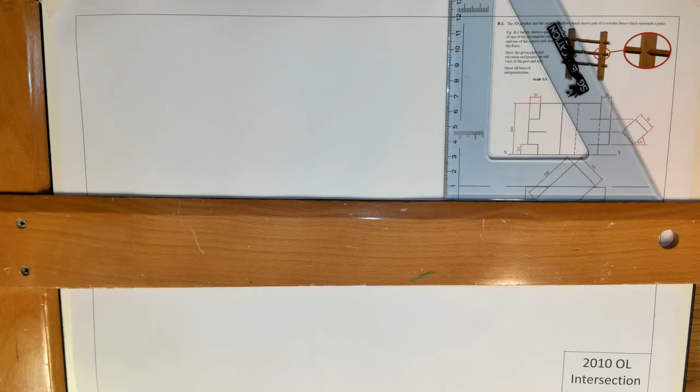So this question is 2010 ordinary level, intersection solids again, and we're going to have a similar problem. I think the end view is going to come over onto this, but I'm going to draw on top of it. If you're doing it at home, what you could do is take out a blank page and do it.

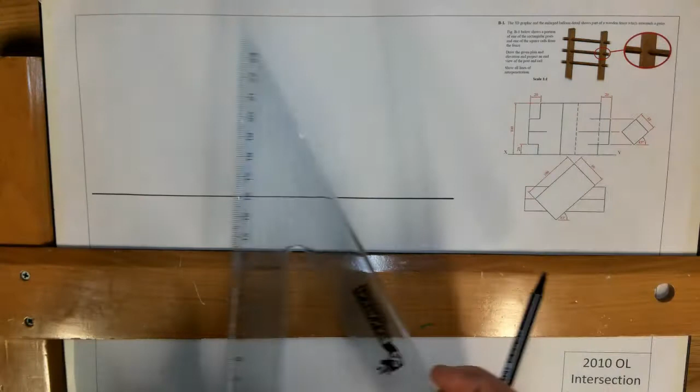So the first thing I'm going to do is come down about 120. The height of our upright is basically 100, so 120 should be fine, and we should have a bit of space. So again, because it's quite close to this view when I have the question put on here, I'm only going to come in 5, no more than 5. And I'll draw a line here like so. And then I'm going to come in 20 and I'll draw this line.

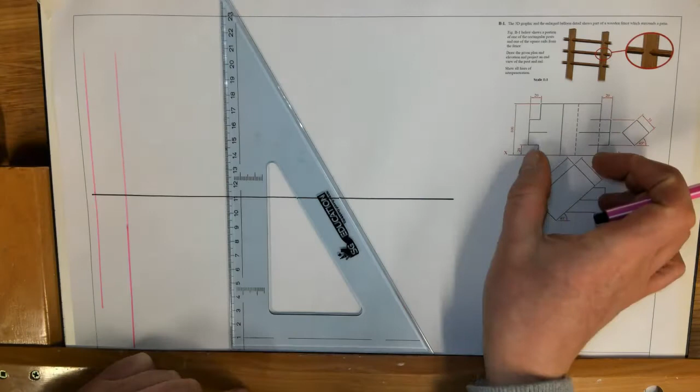And then I become stuck in the fact that I don't know this width, so I have to draw out the plan first. So this is a 45 line, so be careful that you use this set square. When I was drawing it first, I accidentally used the other set square. And we're going to start with this point here. So we know that this is 100.

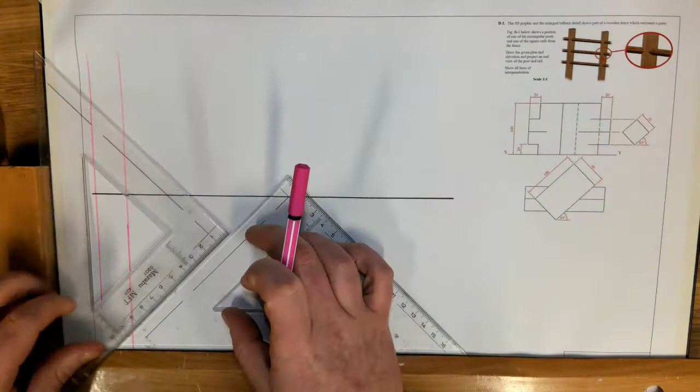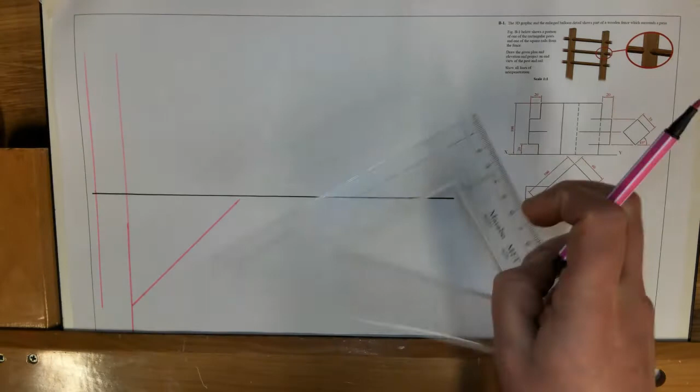So keeping it up as close as possible will allow me to minimize the distance it goes across the page. I think when we did this before, this worked out at about 95 from my recollection. But anyways, we'll just measure. So what I'm doing is I'm just measuring how far I can go down that I'll get 100 millimeters and still be fairly close. So I can fit 100 millimeters there. Probably could have come up a tiny bit closer.

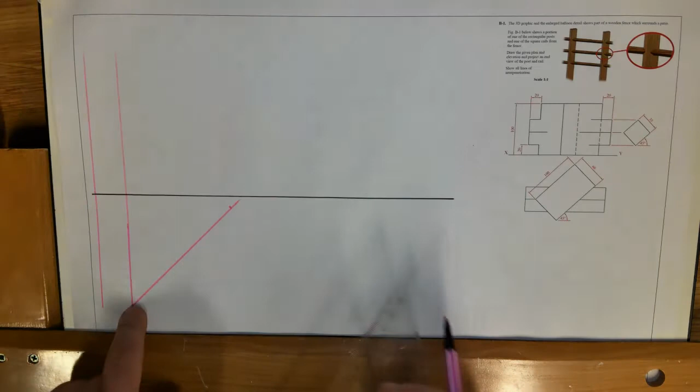No, sorry, I'm wrong. I come down about 80 millimeters for that point. Even 75 actually would be fine for that starting point, which is basically this one here. Okay, so 75 would work fine for that. So I came out 100 that way. I'll go 60 this way. I'll bring this down like so. And I'll bring this across to it.

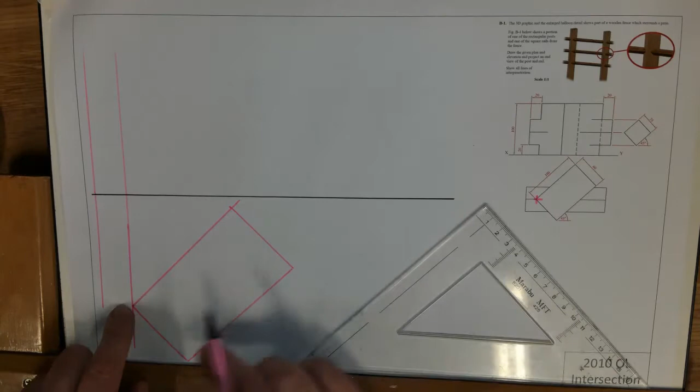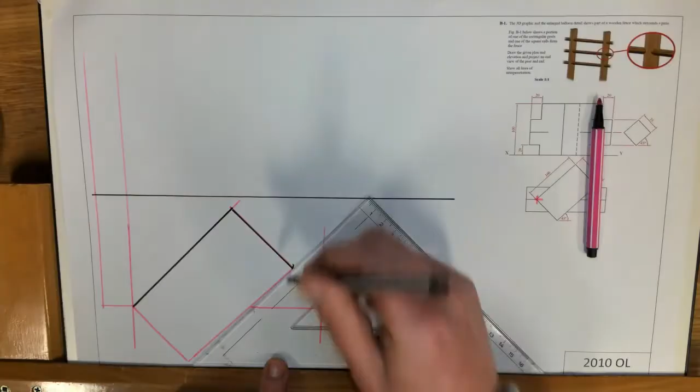Okay, and at this stage now I have the point for this line, and this here sticks out another 20, so I can draw that. So I'm now going to heavy in what I know. I'm happy with this shape here, the cuboid that's sticking up at 45 degrees. And I'll sort out the other line in a second. Okay, happy with this. And I can draw the center line across.

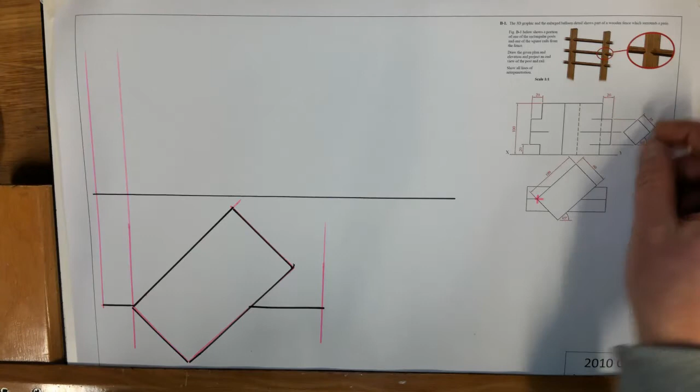Okay, so I'm going on top of my thing, that's why I can see one of them through the other. Again, I have a little tape here that's causing me a little bit of problem. But I have my basic shape there like so. Now, I can't measure this width. I know it's 35 this way, but I don't know, when I look straight down, what's the width from here to here. So what's the horizontal width, the straight across width? This is diagonal width or slanted width.

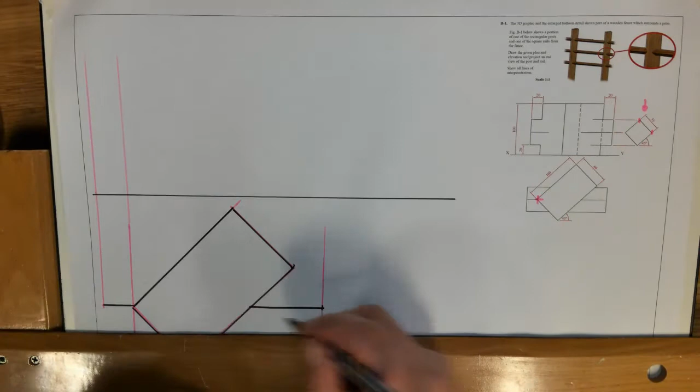So what I'm going to do basically is start drawing in some of the elevation, and then we're going to look at the end view in order to figure out this width. In some of the previous ones they gave you a distance this way so that you can figure it out. In this case we have a sloped distance and we can't use that to locate it. So what I'm going to do is bring up these points like I would typically. Okay.

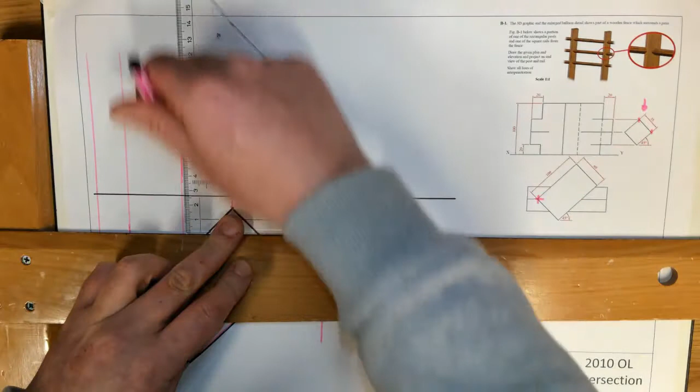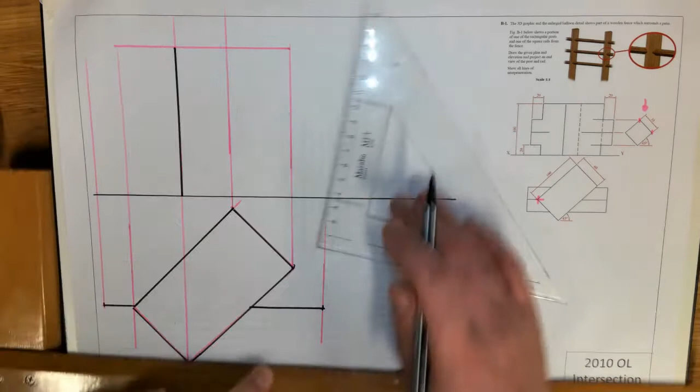And we'll start with the cuboid structure, because that's probably the easiest. So we'll go with 100 mil there. Now here we can't heavy it in because it's going to stop and we don't know those heights, and you'll see that in a second. But here I can draw it solid because if I stood here I'd see that line, and this one here I can draw it.

Okay, and this one here is a mixture of solid and hidden, but I'm not going to draw it in because I don't know exactly where it starts. Okay, so I do know that if I come up 20, I'll have the baseline. Okay.

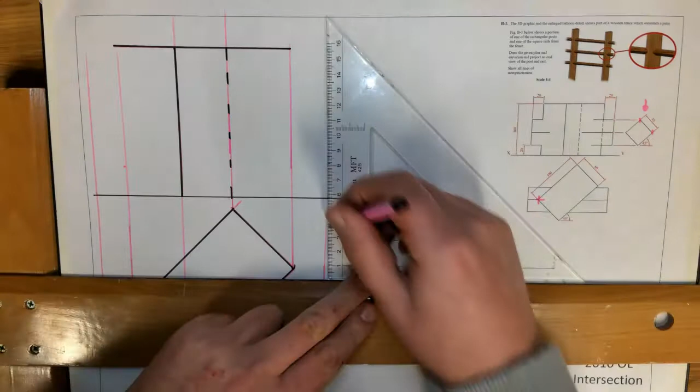Sorry, when I drew that line before, it was a little bit crooked. I must have accidentally had my T-square not in tight. Okay, so we have that baseline. Okay, so I'm sort of limited now on what I can do without an end view, and this wouldn't be uncommon. So what I'm going to do is, this is the end.

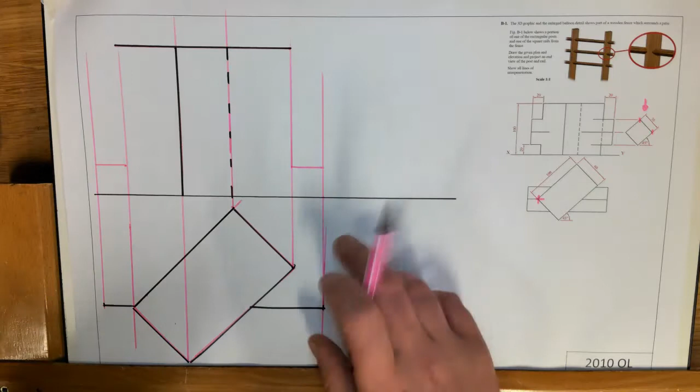So maybe, let's see, I'll shade. They didn't give a color this time, but I'm going to shade this thing here green, to sort of keep it consistent with what it was the last time. Okay, so I'm just going to shade this so that you can see where the end of it is, and the main reason for that is so that you can see where I'm putting my 45 degree line

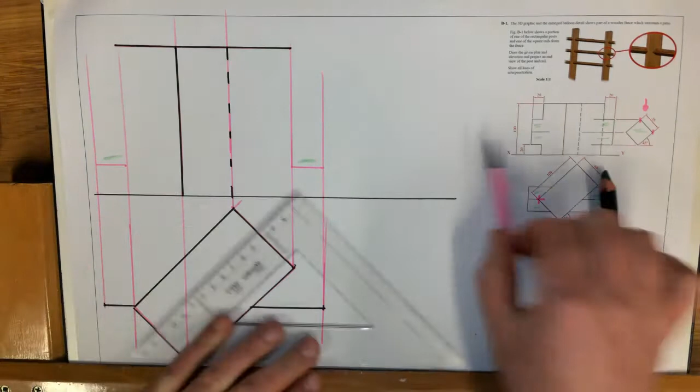at a slope. So I'm going to go down, as I've been doing, 45 degree lines from here, and then I'm going to project it across to meet the end view. I might be lucky, it may just miss the drawing. So I'm just going to use a slightly different colour, this orange, to bring it across. So at the minute, all I can bring across is those 4 points.

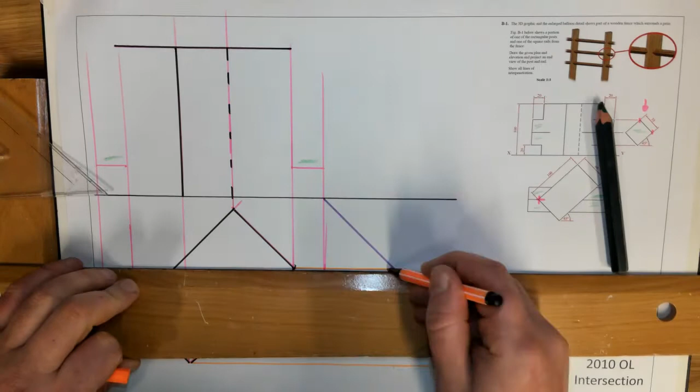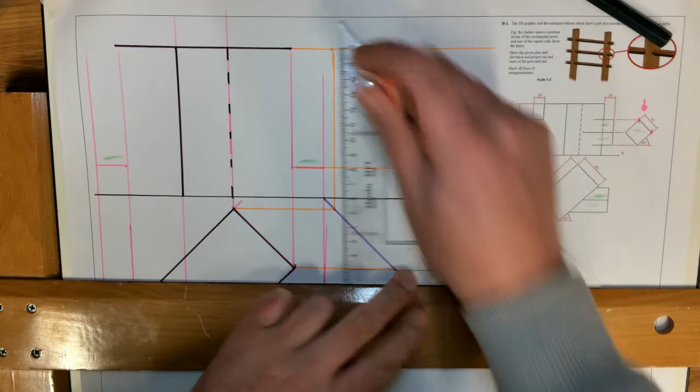And I can bring across this line here to this view, and I'll bring across this. And I'll probably have to extend this baseline. So it may come onto this view, we'll see in a second. So I'm going to bring these up from here. So this one here is fine. This one here is fine. And we'll just see now will it fit. Looks like it just will.

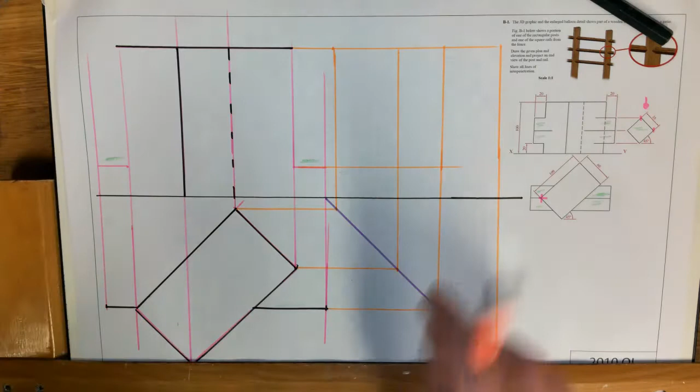So again, as I said, if I leave 5 millimeters of a gap here, this will just fit in on the other side. And again, this is another important distance. Only come down 75 for this point here. Okay, so what are we going to do? We're going to mark this point here as the center.

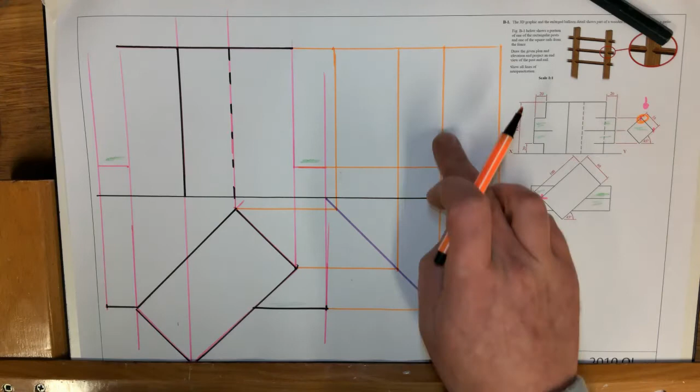So this is basically the bit that we have to take. This is the top edge of this. So basically this point here. So if I bring this up here, and it would also be the bottom, because one would be on top of the other, I can now draw in this shape here, my green shape, in this location. So just highlight that point. So that's basically the base point.

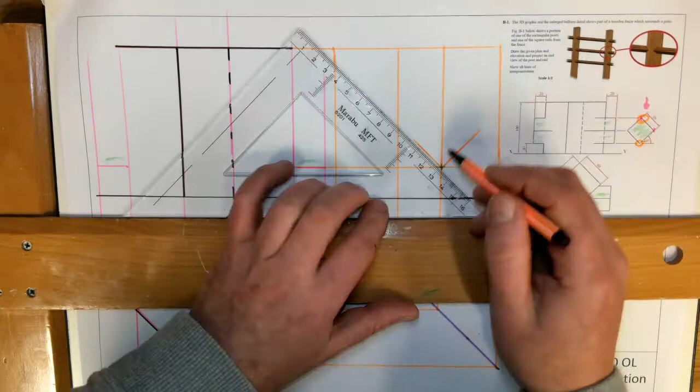So what I'm going to do is go at 45 degrees this way. I'm going to go at 45 degrees this way, maybe a little bit further. And I need to mark a distance of 35 on that. So 35. Okay. And the other side, I could mark it this way, or technically I can bring it straight across, and then come back 35 this way. And if I'm accurate, that should line up.

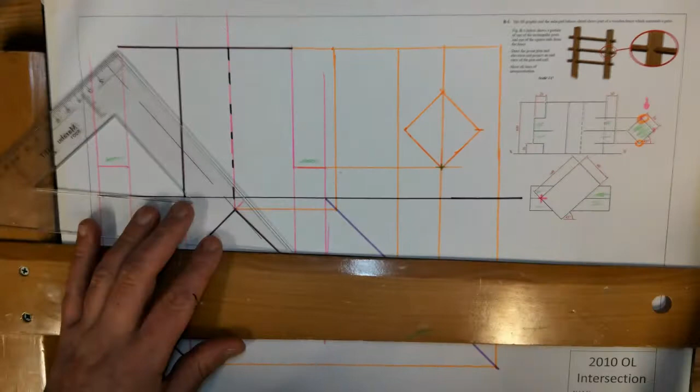So I have my, well, we'll call it a diamond shape in that view, but basically it's the cross rail that's coming across here. So what I'm going to do is heavy that in. Again, it'll make it a little bit more smooth. So hopefully that makes sense. So I'll just try to repeat what I did there again just to make sense.

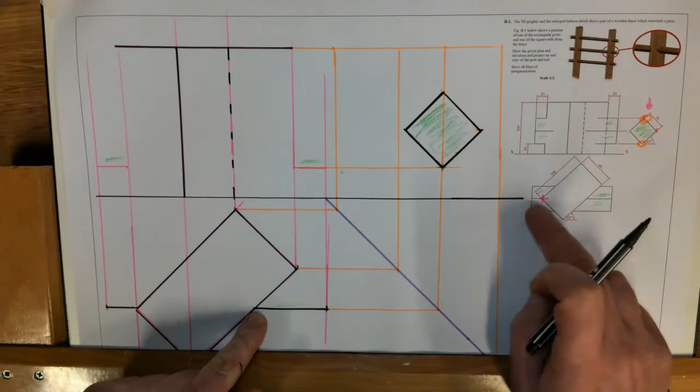So this is basically the top view of this structure that's coming in through the end view. So this point here is this line, which is the center. So what I did was I brought the center up and brought the center across at the starting point. I come out 45 degrees this way, measure 35, and I constructed that. So now once I have this, I can finish off this part by bringing this across.

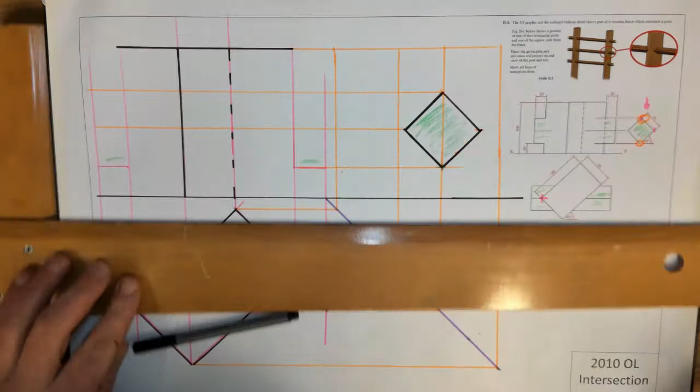Okay, and I'm just going to heavy in what I have just to make it a little bit more stable. So I now can heavy in the whole outline. So that was that, that was that, and that was that. And we'll worry about where the lines start and stop in a second, but basically on my lines I could actually do my hidden detail part there at this stage.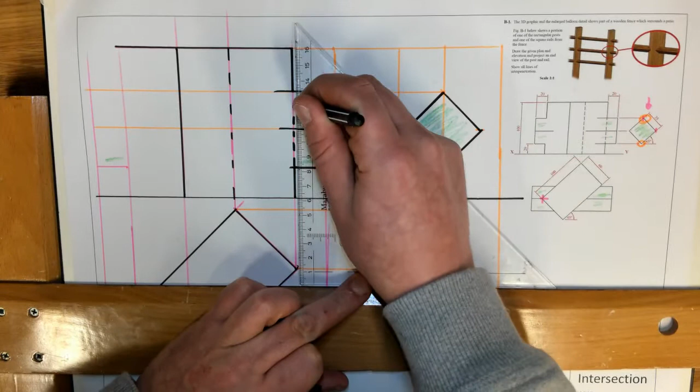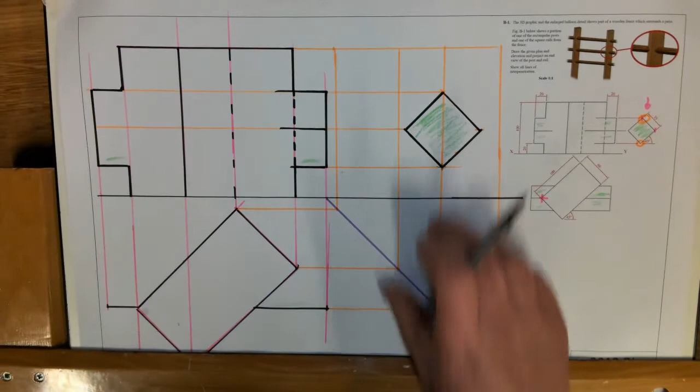Okay, and then this one here, we have it like so. Okay, so we have our front view done. We still have to complete our plan. So again, because I was able to bring these lines across, I can also work from this way back down. So I'll just use a different color. I'll use the pink to come back down. So that's this point. This point. I'm sorry, because the way this is, I should bring this down to the purple line.

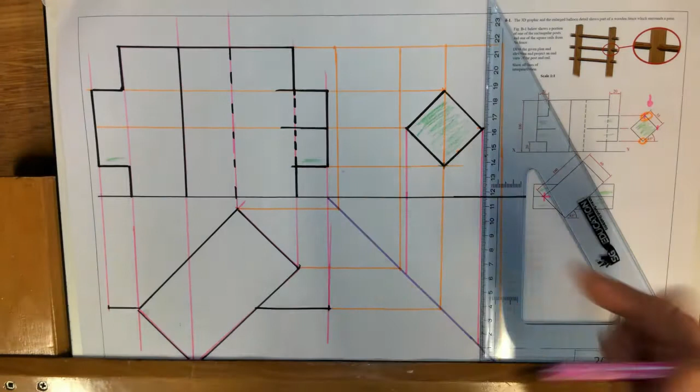Now, I could do this a different way. I could also just take this distance and step it off here. But I may as well project it back. It's probably the quickest way of doing it. Okay, and that looks pretty much perfect. Again, you can see there's a small gap between there and I have a small gap. So I'm happy with that. So I'm always checking the question off against what I'm producing. So I now have the plan completed.

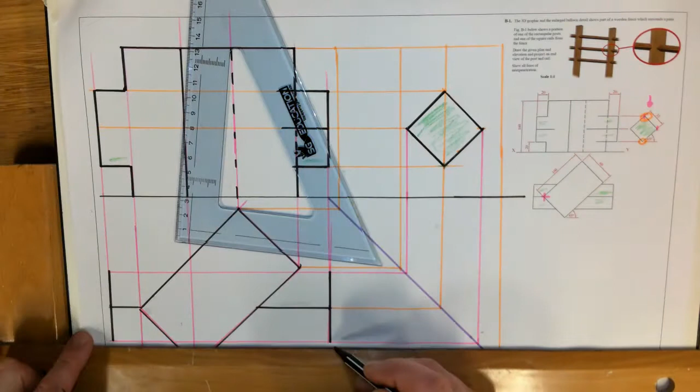Okay, so I've produced what I'm given here, and I now have to figure out these bits here. Again, I'm going to draw this line across. So I'm going to start on this side because it's the easier side. So again, we just shade this maybe in a green a little bit. I could spend a little bit more time, but just to speed up the video, you can see that there. So what I want to do is I want to figure out, well, where does this green structure go into?

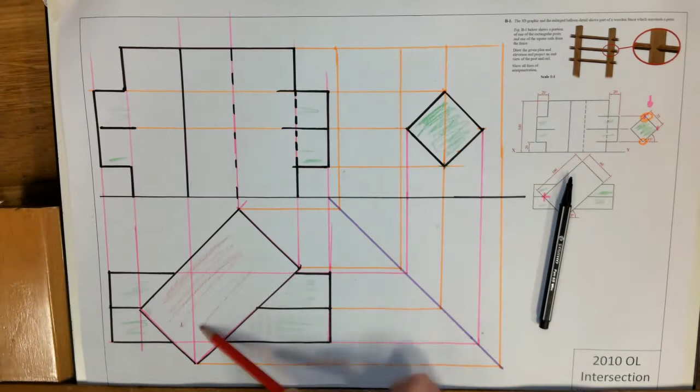Just get another colour pencil. We'll mix it up. Oh, I won't use yellow, maybe a teal. Oh no, that'll be too close to green. Okay, so maybe this orangey red. Okay, so let's see, well, where does that go into? We're not going to come as far as that, but that'll give us some idea just of what we're doing. So where does it go into that structure?

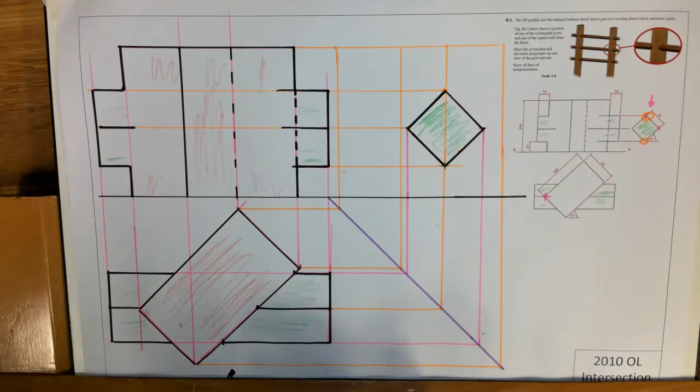So the first thing is, if I'm standing here, which is basically my front view, what will I see? Well, I'll see that point and that point and that point. And one of the things just to be aware of is these 2 points here are the outside edges, and this point here is both the top and the bottom. So I'm going to label it here in the end view. So I'm going to write point 1, 2, 3, and 4. And I'm going to come round here. Well, this will be where 1 is. This is where 2 is. And then 3 is actually on the same line. It's underneath it. And this is point 4.

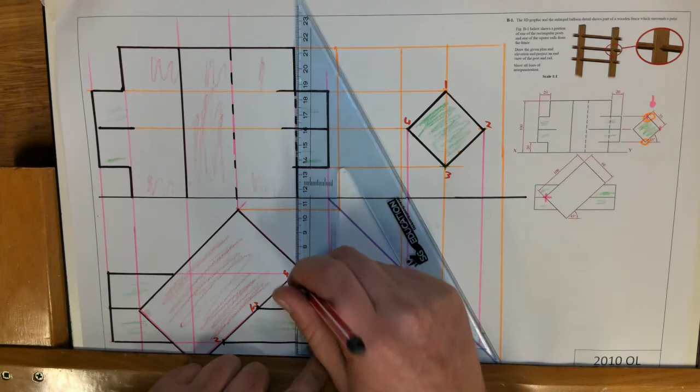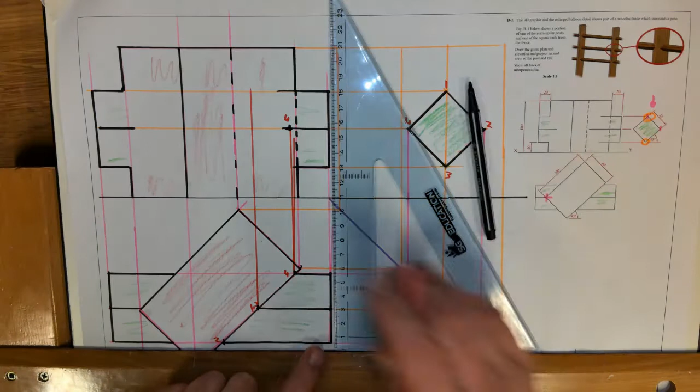So what I'll do, I'll bring these up. So we'll start at 4. Oh no, it's going to become hidden detail. Sorry, my T-square moved again. Okay, it just seems to hit off in the smaller question. So there's point 4. So I'll just mark it for a second, and then write it there. Apologies, there's 2 lines there. 1 and 3 are here. So I need to bring this across to meet it. And bring this one. Well, that's already across. So 1 is the one on the top, 3 is the one on the bottom, and then 2 is here.

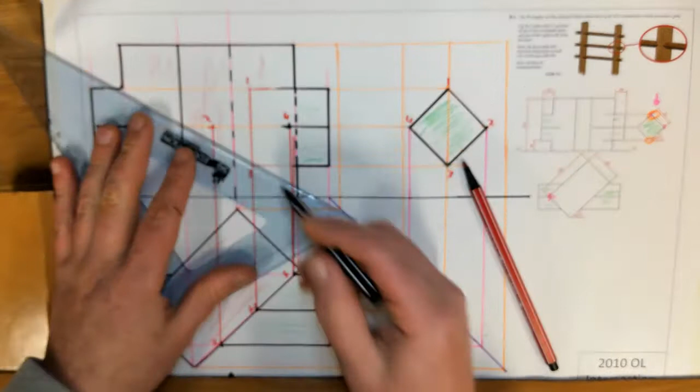Okay, so if you imagine, I'd see 2 and 1 and 3, and then 4 would be where the back is. This structure would have went back from the top. So 1 to 2 would be solid, and then 1 to 4 would be hidden because it would have turned over and be at the back, so behind the structure. Should touch down there, and 3 to 4.

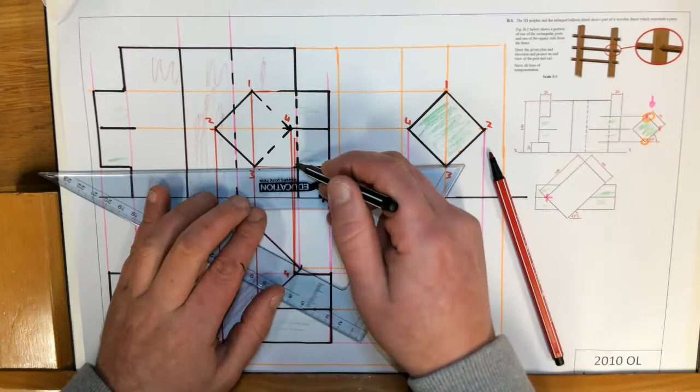Now again, as I said, particularly for this, seeing as we haven't done it in class and we're doing it online, I wouldn't worry about not getting this hidden detail. That's quite difficult to understand for some people. So what I would do is definitely just draw it in as a line, even if it was a solid line or a light line. If you didn't fully understand the hidden detail, there's not many marks for figuring that out, because again, it is quite a difficult part. So I'm now going to label these again: A, B, C, and D. And A, B, C, and D have got to do with where it comes out the other side.

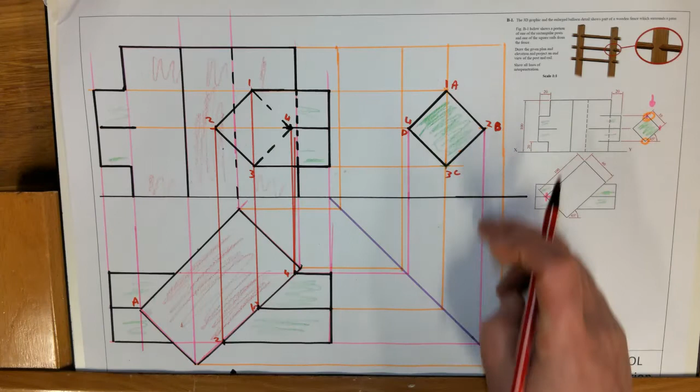So I just used a lettering system rather than a numbering system, just to give the idea that it's a different part completely. So we have A, B, C, and D. Again, I'm going to follow A, but we're talking about it over this side. So here's A, here's B. The key to this question is to label. Here's C. Again, similar to 1 and 3, A and C are in the same plane, and here's D.

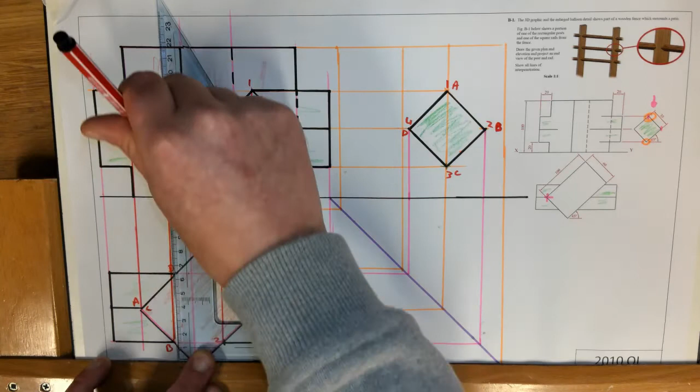Okay, so what we'll do is we'll bring them up. A is already on the line that it is, and B and D are symmetrical in this case. Mine are a tiny bit off just because of the thickness of the markers, but they're pretty much in line with each other. So A, I'm happy with, is here.

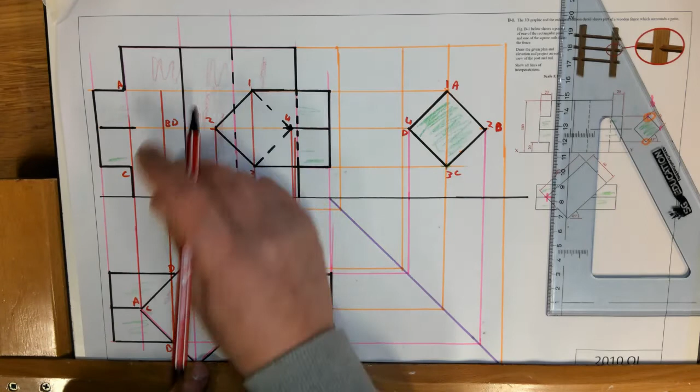B is here. C is here. And D is here. This is how much I'd see B and D lined up. Again, because it's symmetrical, one is going to be exactly the same distance as the other, because it's hitting at this exact same point. So you follow around the order that they went in the end view. A went to B, went to C, went back to D.

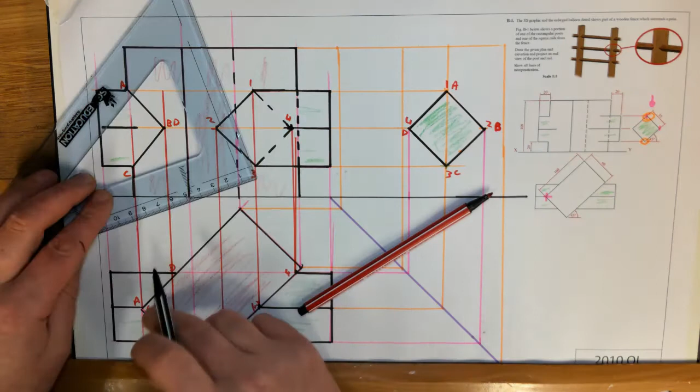Now technically that would be a hidden line. I went back to A, that would technically also be a hidden line because they're at the back, but a solid line overrides a hidden line. So there's the question. That lines up with what I'd expect, because that's why they stopped that exactly there. They didn't bring it in a little bit further. So they give you that, so you're happy with that.

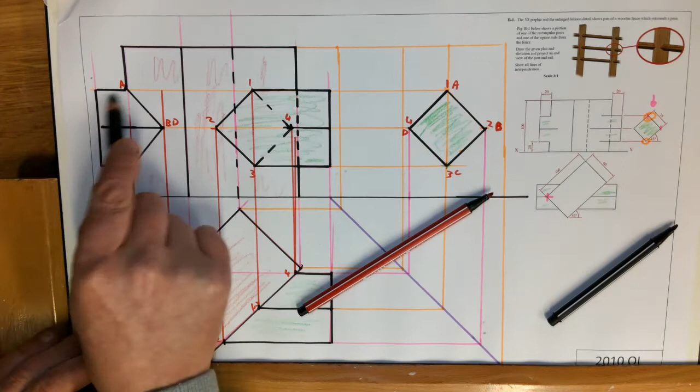So what I'll do is just a little bit of shading, and then that's it completed. I'll just continue this on. This might make it a little bit easier. In fairness, I've seen that some of you did some very good shading for the questions you handed up from yesterday. It made it a lot easier to look at the question, and hopefully it made it easier for you to figure out what's going on. I know Emily was one that had a nice bit of shading on it.

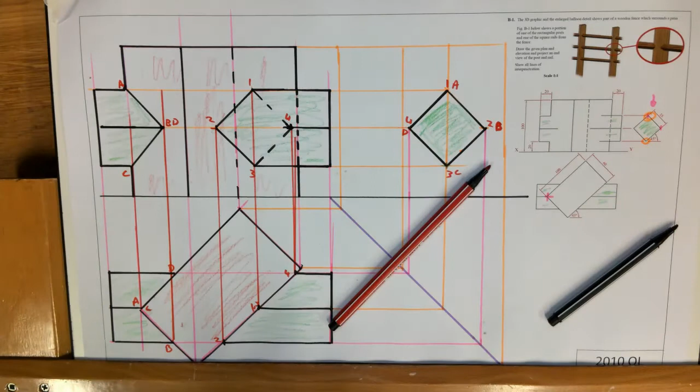So the last bit I have to do is just complete the end view. Again, you have to remember that if this is the end view and I stand this side, what would I see? I would see this corner here, where A and C is. I'd see this corner, this corner, this corner, but I wouldn't see that corner. So I'm going to follow that one here because that's at the back, so that's going to be my hidden detail part.

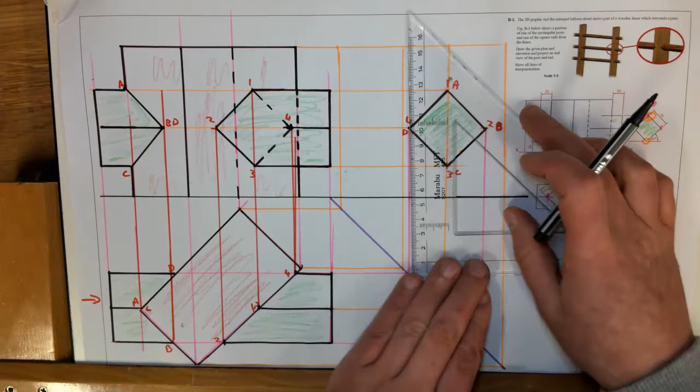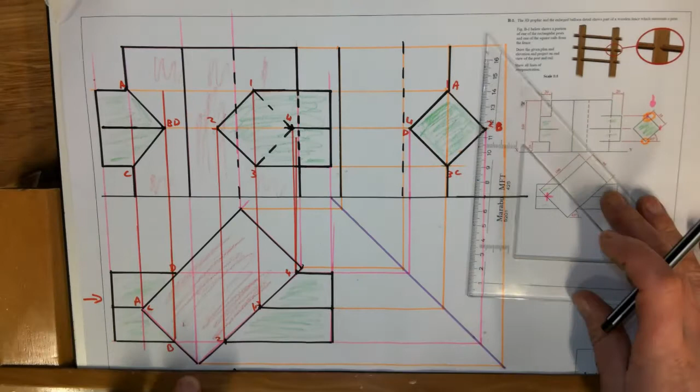It depends on the shape, obviously, but typically I'd see 3 edges if it's a cuboid, and I wouldn't see the other one. So this one here I would see, so I'm happy that that would be solid. This one here, I wouldn't see it. This is going through it, so there'll be no hidden detail in there because that's a slot going through it. You'd assume it's like a mortise or a hole that would have been cut for it to slide through.

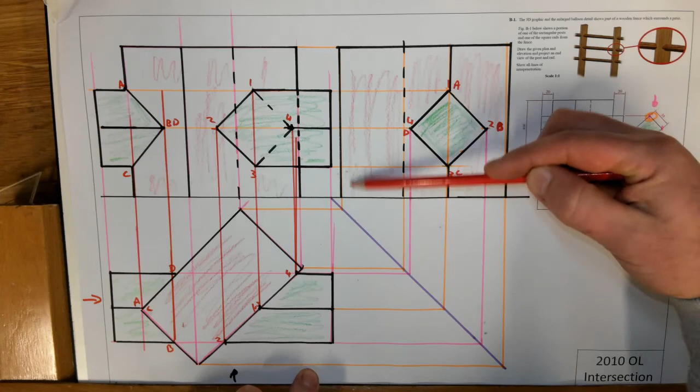And we're happy there with my end view. Okay, so that's the question completed. Again, I could shade this red, I could spend a lot more time shading this, but it's just to give the general gist of the idea, and so that I don't spend ages on the video of you just looking at me shading. Do it a little bit neater, but the general idea is there. So there's my question completed.